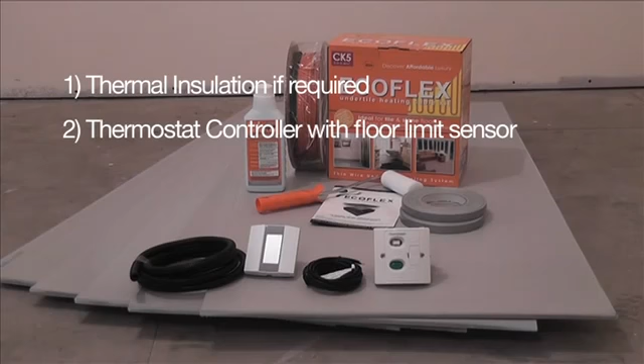Ecoflex undertile heating kit is a complete heating element solution in a box. You will require the following accessories to install the heating system: thermal insulation if required, a thermostat controller with floor limit sensor, and RCD if not already fitted. Before commencing laying the Ecoflex heating cable, plan your installation using a sketch, marking your laying pattern and planning the positions for the wall-mounted thermostat, floor probe and junction box.

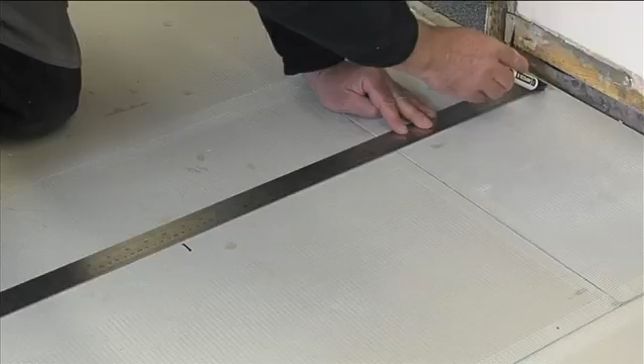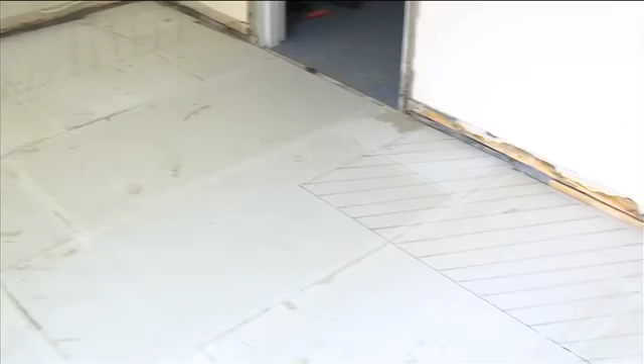In new build installations, mark the position of floor-fitted objects that will be installed once the floor is finished. In kitchens, this could be kitchen carcass units. In bathrooms, it may be baths or showers. These areas should be avoided. Also avoid laying cables in areas where floor fixings may require to be drilled.

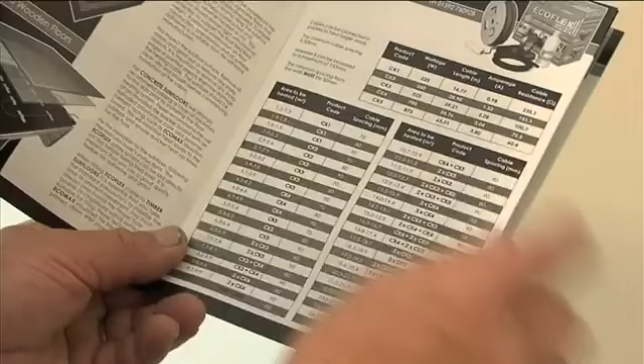We recommend that you spend time planning the installation and accurately calculate the free area of the floor that you want heated. This calculated area should then be used to select the correct cable kit size. Remember to subtract any areas covered with floor-fitted furniture. It is important to select the correct cable kit size as the cable cannot be shortened.

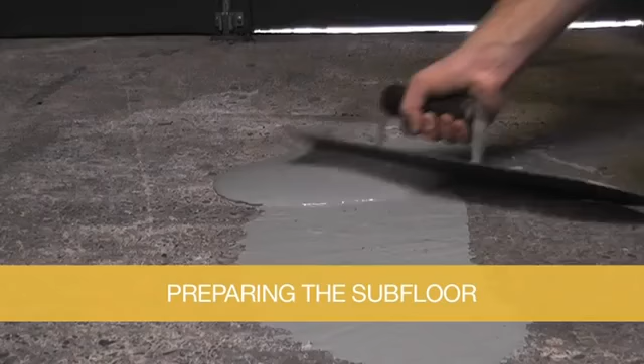Ecoflex cable kits can be installed on top of existing wooden or concrete subfloors that are sound and suitably prepared. Subfloors that have a rough finish should be prepared using a suitable levelling compound. On solid concrete subfloors, it is strongly recommended that Ecomax insulation boards are laid before installing the Ecoflex cable kit. This will ensure quicker heat-up times and reduce running costs.

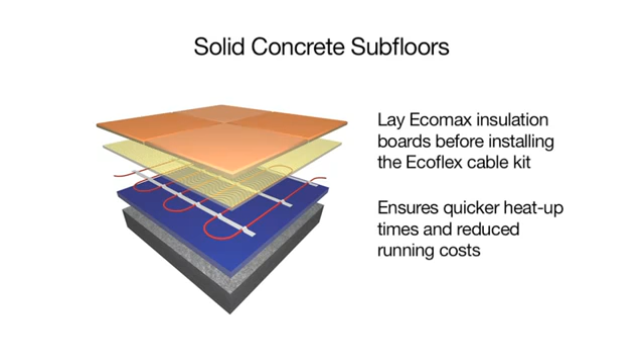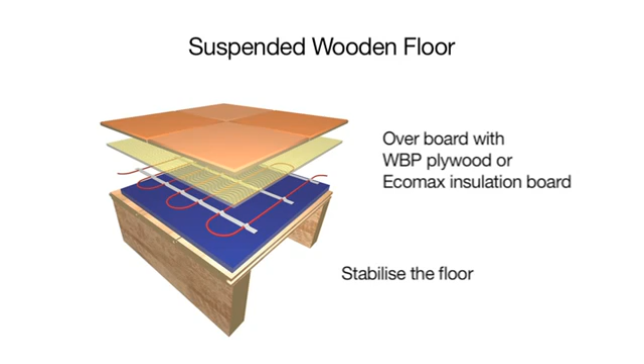On suspended wooden floors, it is essential that you take the standard precautions to stabilise the floor to prevent floor movement. You should always overboard a timber floor with a suitable surface for tiling. Flexel recommend WBP plywood or Ecomax insulation board. The insulation board should be laid using flexible tile adhesive or by securing using mechanical fixings. Scrim tape should be applied to all joints.

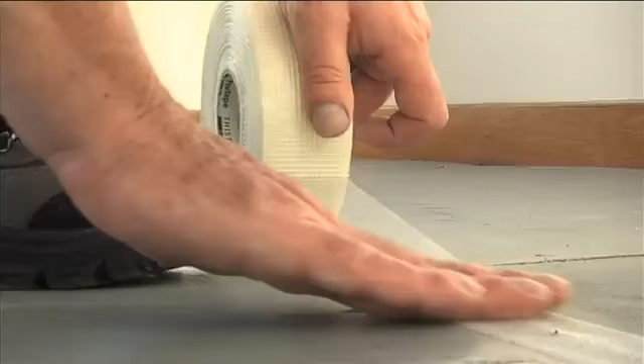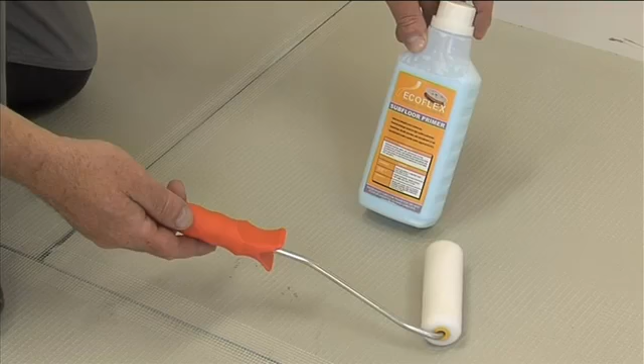The entire floor should be swept clean, taking care to remove any sharp objects. Ensure the subfloor is clean, dry and free from any grease. Paint the prepared subfloor with the primer supplied with the kit. It is colour tinted for easier coverage control. The primer should be allowed to dry to a clear finish. This may take several hours dependent on ambient temperature conditions.

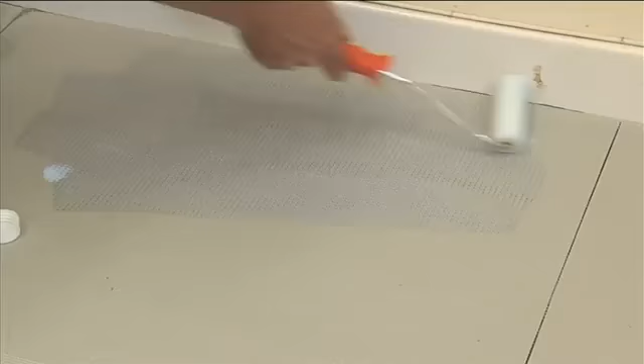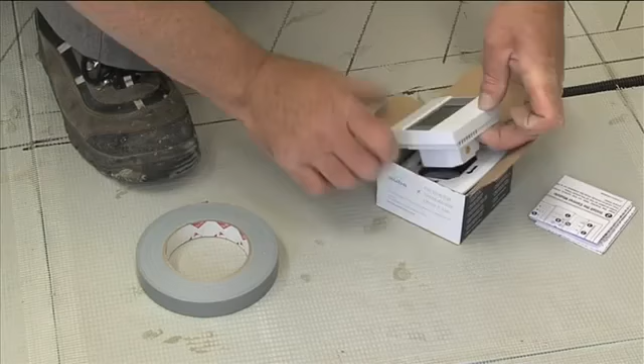Mark the layout of the Ecoflex cable on the prepared subfloor with a fibre tipped pen. Mark the perimeter of the heated area together with the cable spacings obtained from the instruction manual. This will provide your cable laying pattern. Mark your cable start point. Ensure that this is close to the planned thermostat position. The Ecoflex cable coattail is 3 meters long. Cable spacing and perimeter wall clearance must be a minimum of 50 millimeters.

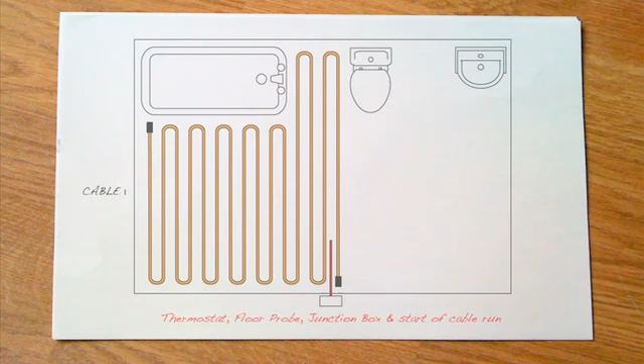A heating system for larger areas will require 2 or more heating cables. It is important to note that when installing multiple heating cables to take the following precautions. Plan your installation so that all cable coattails, the black power cables, terminate in one junction box. Multiple cables are joined in parallel. The orange heating cables should never cross at any point. Heating cables should never cross over the floor probe.

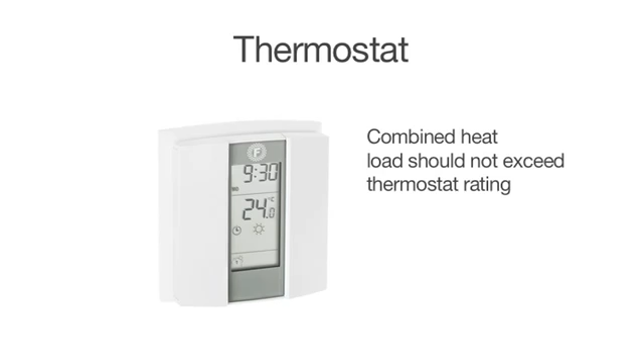A single thermostat can be installed to control multiple heating cables. However, the combined heat load should never exceed the rating of the thermostat. If this does occur, a suitably rated contactor should be installed.

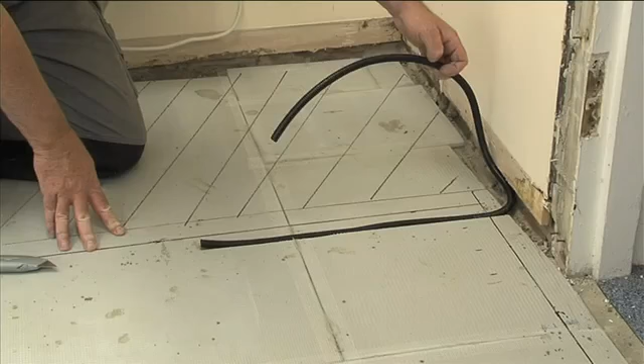Before commencing laying the cable, cut a groove in the floor to accommodate the floor sensor for the thermostat. The sensor should be installed in the 12mm diameter flexible conduit supplied with the kit. The sensor should be positioned between 2 cable loops approximately 500mm into the heated floor.

Seal the end of the conduit with tape to prevent adhesive entering. Insert the sensor and tape to prevent it being accidentally removed. Insert the assembly in the groove and tape into position.

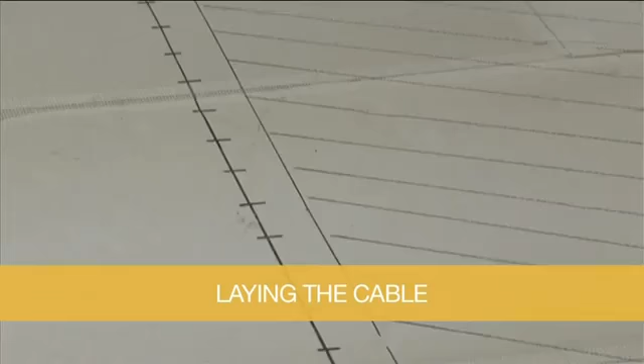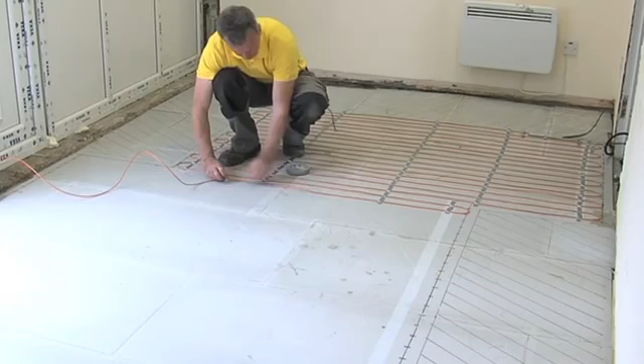Once satisfied with your marked up laying pattern, unroll the cable and lay in parallel loops using your pre-marked floor plan as a guide. Secure the cable to the floor using short strips of the adhesive tape supplied. At this point, only use a minimal amount of fixing tape, as you may wish to reposition the cable loops once the whole cable has been unrolled to achieve the best fit for the room.

It is important that you do not remove the cable from the drum before laying, as it may twist and make installation difficult. Only unroll sufficient cable to lay a single loop. Place and tape in position before unrolling the next quantity.

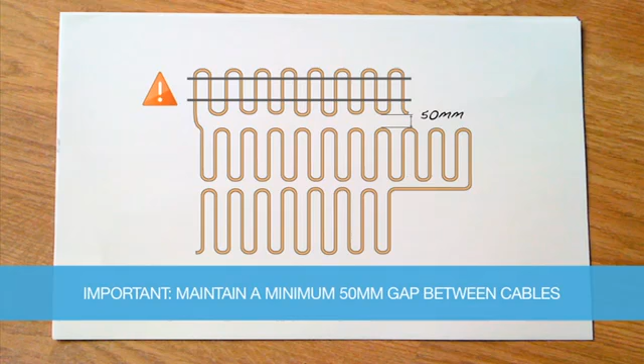Always maintain a minimum 50mm gap between cables. The orange heating cables should never cross. The orange heating cable can never be cut. Don't lay the heating cable under any fixed furniture. Only install the cable on one level, never on stairs or up walls.

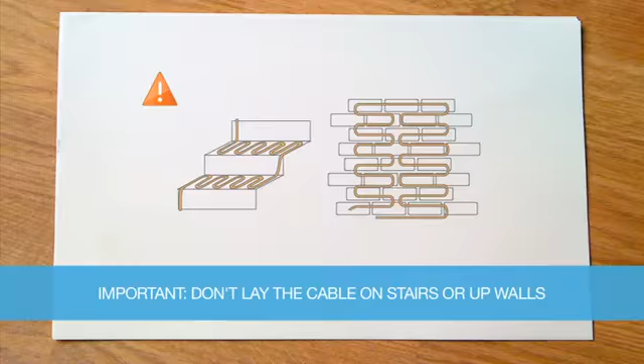Once the cable layout is complete, the entire length of the cable should be taped to the floor. This taping process will provide additional protection to the cable and prevent movement when applying the tile adhesive. When applying the tape, it is important to minimise the amount of air trapped between the tape, cable and the floor. Run your forefinger and thumb along the length of the cable, applying slight pressure to expel any trapped air.

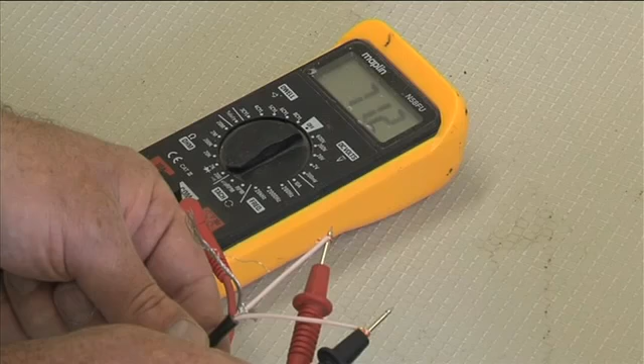Check the cable resistance again to ensure it still matches the correct value. It is good practice to check the cable resistance regularly during the tiling process. If the resistance reading varies outwith the tolerance, stop immediately and call our technical helpline.

The heating cable is robust, however care must be taken not to damage it during tiling. Use a piece of carpet or thick cardboard as a protective layer, or use a kneeling board to prevent damage to the heating cable from footwear or knees during the tiling process. Do not store or cut tiles on the heating cable. Use kneeling pads and rubber-soled footwear.

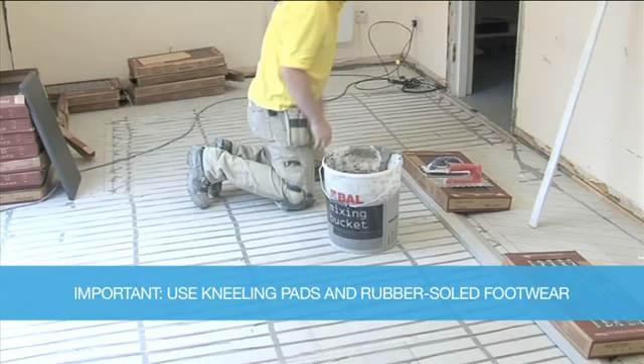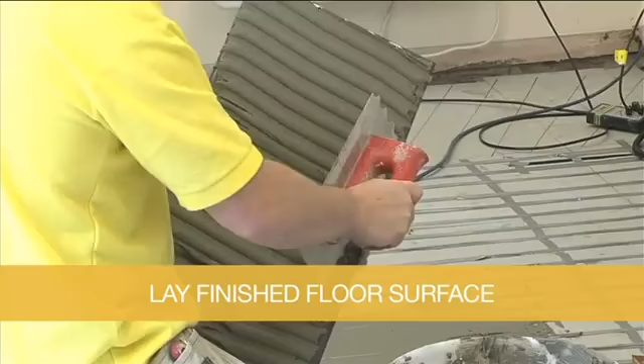Do not leave the cable unprotected if the finished floor is not tiled immediately. Cover with protective material like thick cardboard and minimise foot traffic in the area. Tile as normal using flexible tile adhesive.

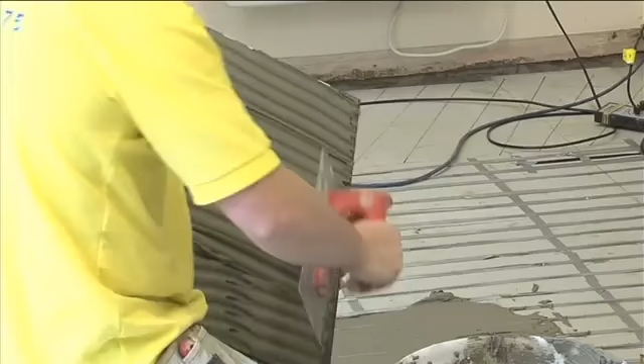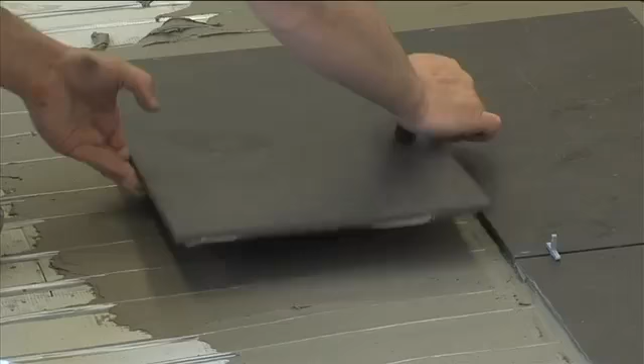Gently comb the adhesive in the direction of the cable runs using a rubber back trowel to minimise the chance of dislodging the cable. Use a notched plastic trowel if possible. Take care not to allow the trowel to come into contact with the heating cable when applying the adhesive. Use sufficient adhesive to ensure that no gaps or voids are left under the tile.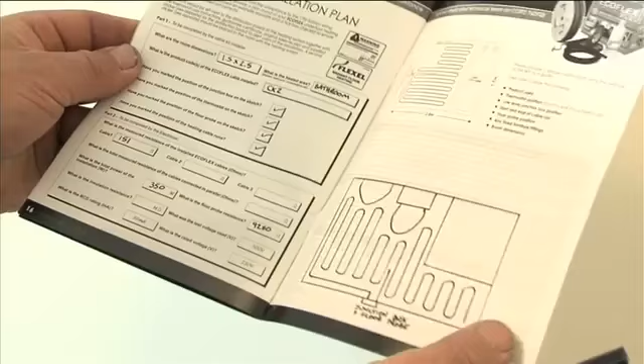The thermostat should now be installed. All electrical wiring should be performed to the current wiring regulations by a professional electrician. Finally, fill out and complete the Ecoflex installation plan diagram and guarantee certificate. These are found at the back of the installation instructions. These should be completed, signed and left with the customer.

The floor heating must not be turned on immediately after the tiling process. Consult the adhesive manufacturer for a suitable drying out period before turning on the heating system. This is usually around 2 weeks.